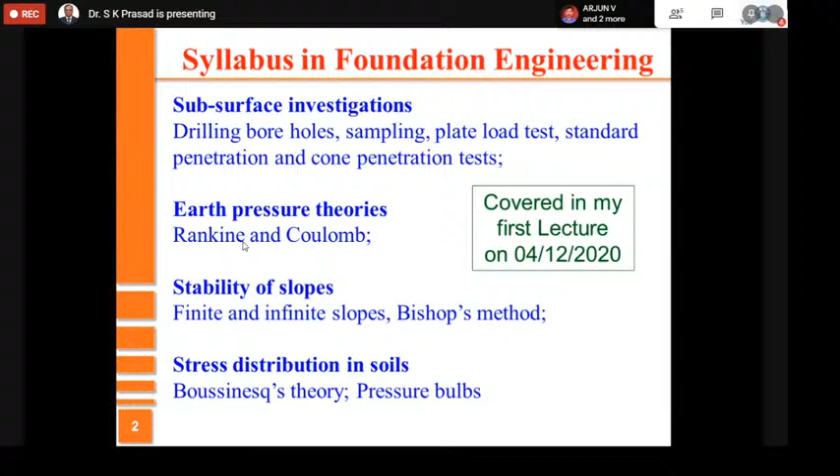So once again, good afternoon, friends. This is my second lecture on foundation engineering. If you remember, I gave the previous lecture on the 4th of this month, wherein I covered subsurface investigation, theories of earth pressure, stability of slopes, and stress distribution in soils. Now I'll be talking about a more important topic in geotechnical engineering, that is foundations. So we have both shallow and deep foundations, and also settlement analysis of shallow foundations. This is a vast subject, and if you recollect what I told in the previous lecture, a lot of questions have come from the shallow foundations area.

So looking at the importance in general of these topics, friends, I request you people to listen to the lecture. And as I said in the last class, the focus is not on giving the concept, the focus is more on cracking the GATE examination. So I don't have to mention the importance of foundations.

As you all know, this is the foundation which will hold the superstructure, which will be in direct contact with the soil below. The major objective of the foundation is to transfer all these forces from the superstructure to the soil below in such a way that the soil is not affected, it does not experience failure, nor does it experience excessive settlement. Therefore, you will be keeping in check the soil, which neither fails nor experiences settlement.

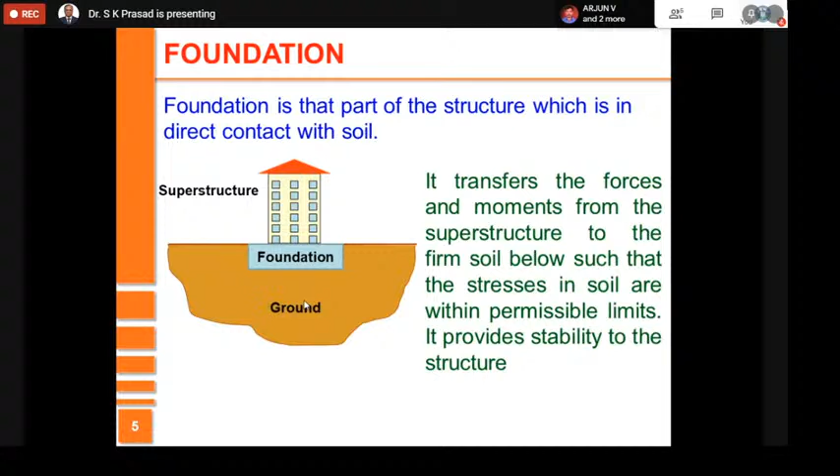So I always say we'll consider the two limit states, just like in case of concrete: limit state of serviceability and limit state of collapse. So one major objective of any civil engineer is that the structure is founded on stable ground, and the foundation is also as strong and as durable as possible. This is the most important organ of the structure, and hence it should be strong. It also should be founded on stable ground.

Then you will always have a question as to what location of the soil you should be interested in. If this is the superstructure and this is the foundation, the soil just below the foundation is the one which is affected because of the stresses induced due to the load from the superstructure. So the stresses in soil should be within limits. How much soil should you consider? Normally, if B is the width of the foundation, maximum 2 times B should be the depth, and 2 times B should be the width up to which you need to consider the effect. Beyond that, the effect of the loads from the superstructure into the neighboring soil will be negligible.

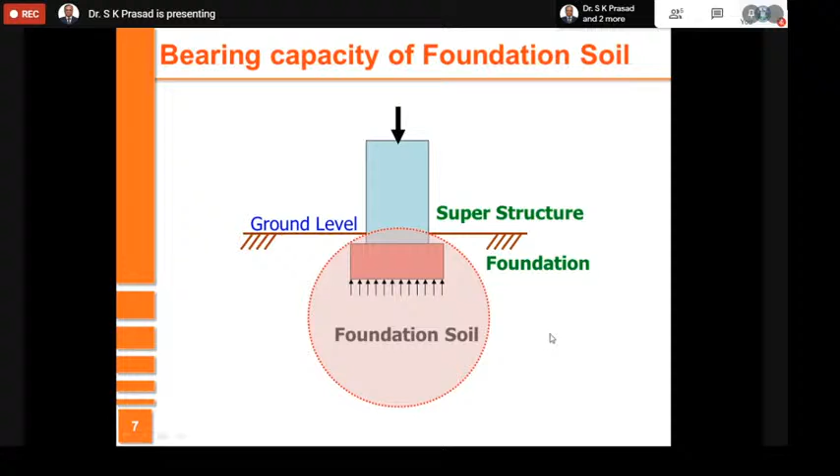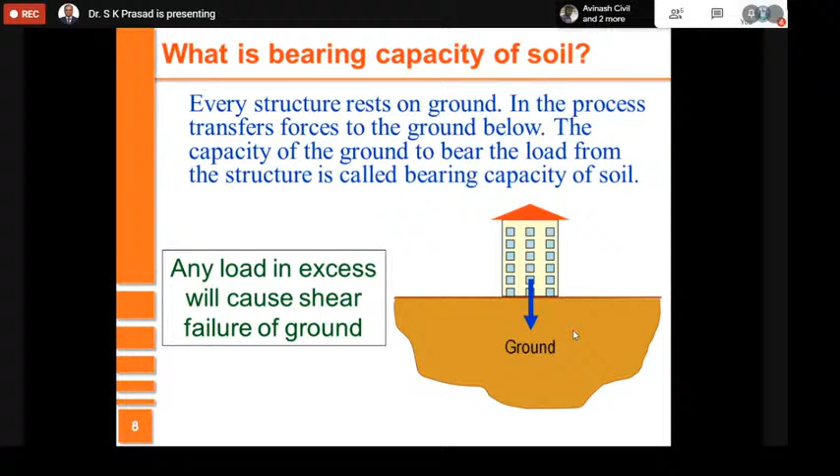As on today, every structure will have to rest on ground. I do not know, in future we may be able to put them in air, but as of now, every structure has to rest on ground, which means these structures which carry all kinds of forces will be transferred to the soil below. That means we have to identify how much load, how much force the soil can take before it fails, because that is very important to decide the kind of foundation for any structure.

Well friends, you have a soil having some weight, and it is for all practical purposes considered to be homogeneous, isotropic whenever possible. But in this case, at least we consider it to be homogeneous. Then we decide the depth at which the foundation is to be put, based on several aspects, mainly geotechnical aspects.

Once we decide on that, we will have the excavation made. Before that, the soil will have some stress in it. What is the stress? It will be the weight of the soil. Now you build your structure, and that structure will carry some weight. Due to that, the stresses here will be much more than what was the stress before, carrying much bigger stress.

We'll have to find out this stress, which later I show you, we call contact pressure. This stress should be within limits. What limit? We'll try to see in the lecture which follows now.

So we have a few terminologies we need to consider. One is ultimate bearing capacity. Ultimate itself shows that it is the maximum value. Bearing capacity is the capacity of the soil to bear that ultimate load, ultimate stress. I use the symbol QF to represent this. It is the maximum pressure which the soil just below the foundation can take before it fails.

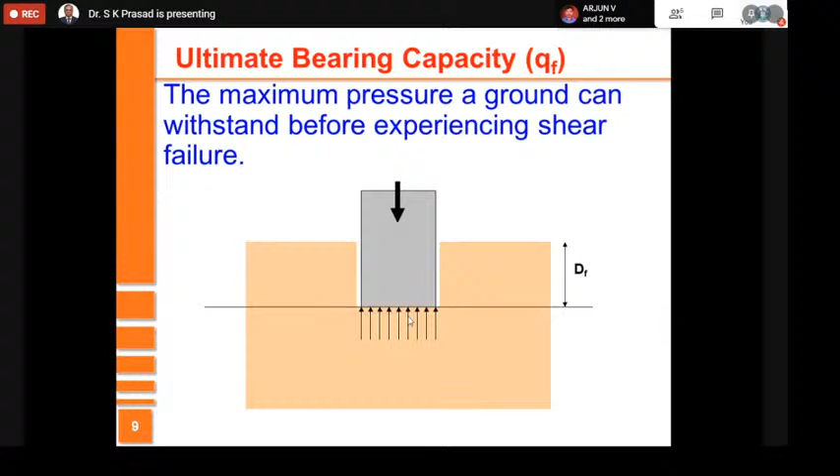All failures in soil are shear failures. Here also the failure will be shear failure. So ultimate bearing capacity, QF, is equal to the maximum force divided by the area at which the soil still does not fail; any further force and there will be failure.

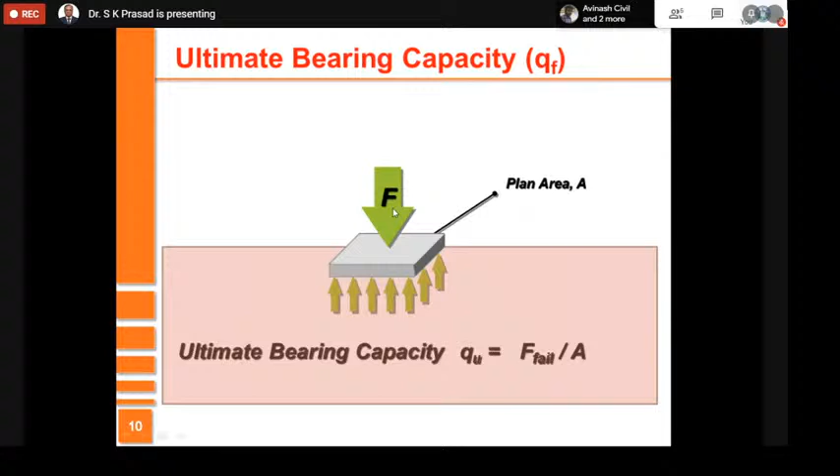We also use this terminology, net ultimate bearing capacity. What is net ultimate bearing capacity? Ultimate bearing capacity is the maximum load it can take. Net ultimate bearing capacity is maximum load minus whatever load it was taking before, that is the initial overburden pressure. So net ultimate bearing capacity, symbol Qn, will be equal to Qf minus initial overburden pressure Q naught. If there is no surcharge, then Q naught is equal to gamma times D, or dF here.

Then the terminology safe bearing capacity. This is very much used in the design office, one of the important parameters in the design of foundations, I would like to say most important parameter. So QS is the symbol I have given. Sometimes we simply say SBC of soil.

So QS is the safe extra load or extra pressure, in addition to the existing overburden pressure, that the soil can withstand. You have the existing overburden pressure, Q naught, plus the net ultimate bearing capacity, which is Qf minus Q naught. Only for the net ultimate bearing capacity do you apply the factor of safety, that's why I call it safe load, in addition to the overburden pressure. So it's always equal to overburden pressure plus safe pressure. Safe net pressure is safe extra load divided by factor of safety.

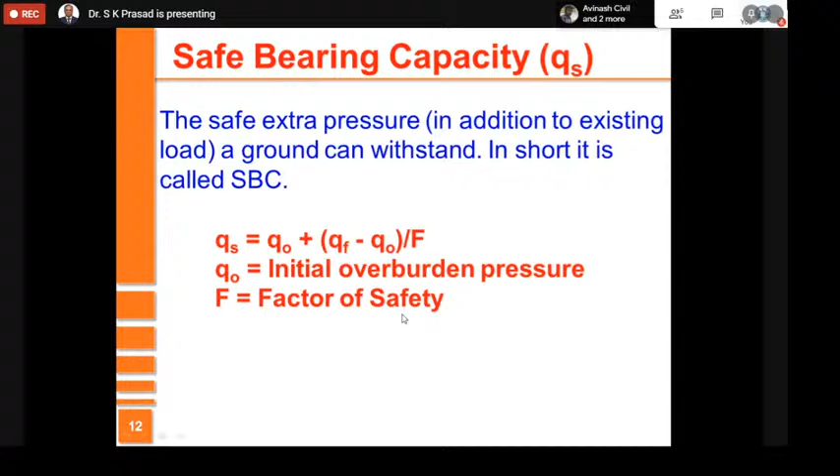Usually, if nothing is given, you can assume a factor of safety of 3. We use SBC very importantly for proportioning of a footing. If you know the design load, then knowing SBC, you can determine the area of the footing. It is one of the most common parameters for the design of foundations.

We also use another terminology called allowable bearing pressure, symbol QA, sometimes called ABP. This allowable bearing pressure is more superior to SBC in design, because it takes into account not just the failure, but also the other aspect, settlement, keeping the settlement well within limits. So it is the safe extra pressure a ground can withstand, considering both shear failure and settlement criteria.

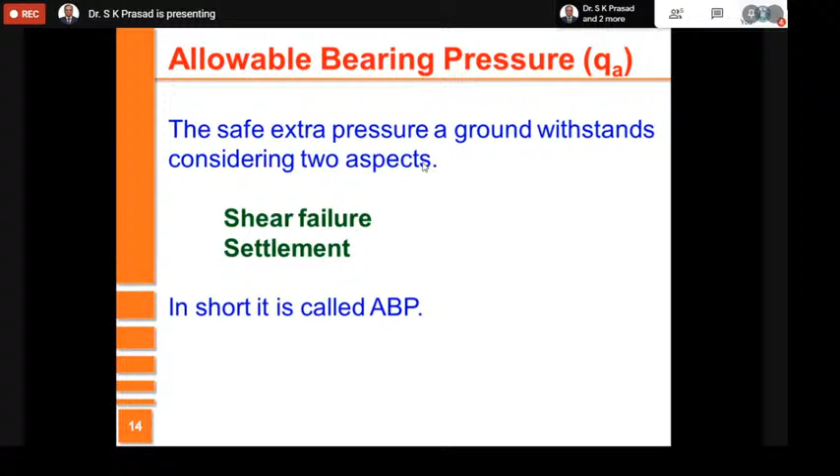Well friends, whenever a load is applied onto the ground, it will be stressed. You keep on increasing the load, stresses in the ground increase till such time it fails. There are many factors which influence the stresses in the ground and the failure of the ground.

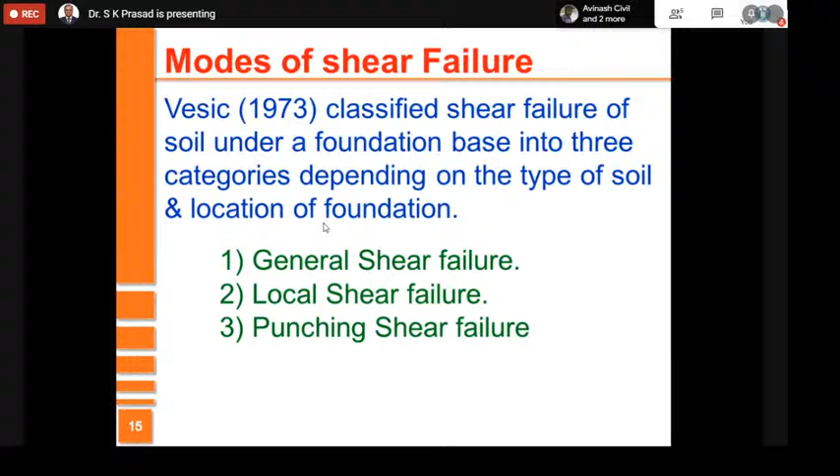One of the important factors is the mode of failure, mode of shear failure. Many researchers have worked on that. Vesic in 1973 was one of the first to mention that there are three modes of shear failure you can think of in bearing capacity determination of ground. The three modes of failure are: general shear failure, local shear failure, and punching shear failure. We'll try to see what these are and how we have to take them into account in our designs.

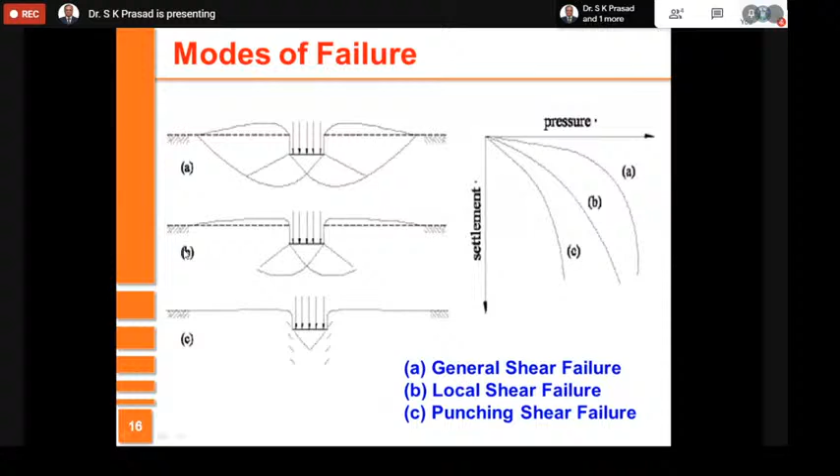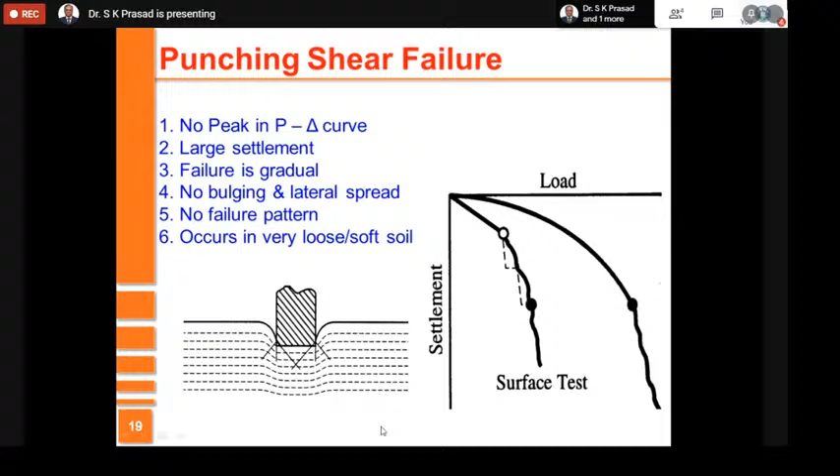You will not see bulging or lateral spread on the sides of the foundation. If you look at the previous case here, this is the failure surface, and it is very clear in general shear failure. On the other hand, the failure surface is not so clear in local or punching shear failure. This type of failure is seen in loose or soft soil.

I have tried to give the differences between these two. The important numerical values you should remember are: general shear failure happens in a soil which has a very large value of phi, equal to 36 degrees or more, in a soil which is stiff, therefore SPT N value will always be 30 or more. The relative density in case of granular soil will generally be more than 70%, and undrained shear strength CU will be more than 100 kilopascals.

On the other hand, punching shear failure is seen in a soil which is loose, therefore phi will be 28 degrees or less. SPT N value is less than 5. Relative density is less than 20%. CU will be less than 50 kilopascals. General shear failure experiences very small strain, 5% or so. On the other hand, punching shear failure experiences very large strains of the magnitude of 20% and above.

This was a graph plotted by Vesic to indicate the locations of general, local, and punching shear failure, plotted between relative density and relative depth. You can notice that general shear failure happens here, wherein the soil is in a relatively dense state.

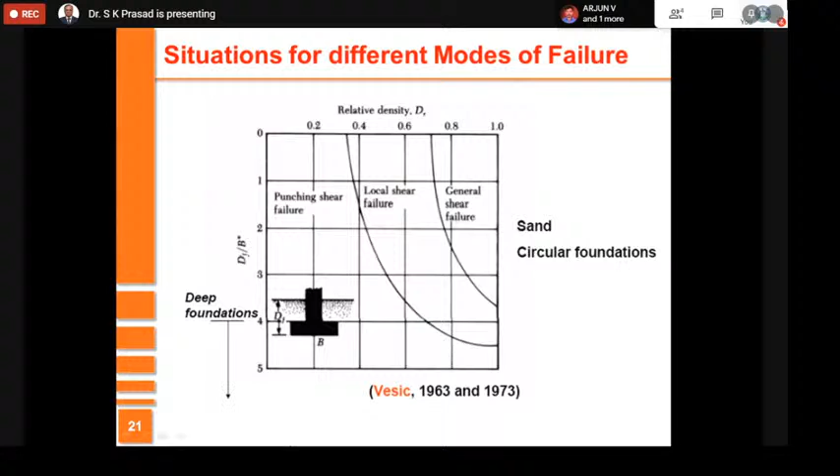So as a summary, phi greater than 36 degrees, we call it general shear failure, and we don't apply any correction in the equations we use. On the other hand, phi less than 28 degrees, we call punching shear failure, and in that case, we apply the correction.

The correction is that the cohesion should be taken as 2/3 of whatever cohesion is. The friction angle should be taken in such a way that tan phi of the system is equal to 2/3 of tan phi. It should be reduced, and accordingly you find phi dash.

Phi dash is used to find NC, NQ, N gamma, which you call NC prime, NQ prime, and N gamma prime. For phi value anywhere lying between 28 and 36 degrees, we just apply...

It's in the transition zone, therefore we try to interpolate, linearly interpolate.

The derivation is done by considering the limit equilibrium approach when the soil is at its plastic failure situation, and it's a semi-empirical method of analysis because somewhere you'll have to make certain intuitions, certain assumptions.

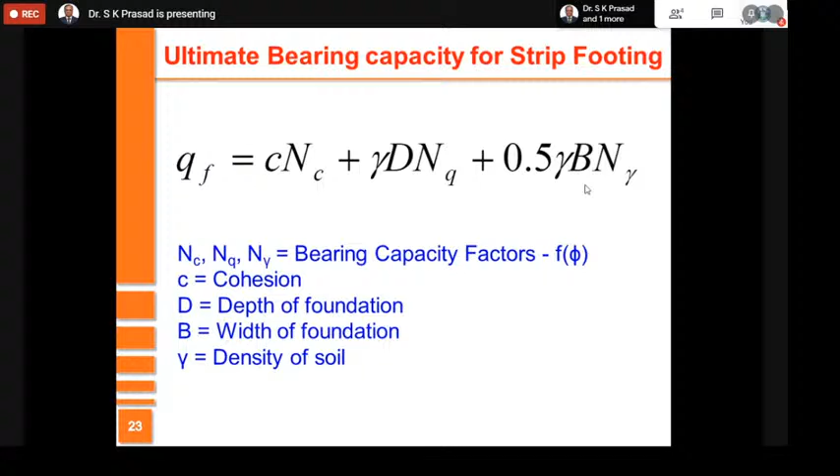Gamma is the unit weight of soil, you can just consider the bulk unit weight at a place. B is the width of foundation, and D is the depth at which the foundation base is placed, depth of foundation. And how do you find NC, NQ, and N gamma?

These are all direct functions of phi. Normally you have equations, you have graphs, you also have tables to determine them. So for various values of phi, it's a function of phi alone, you can find NC, NQ, and N gamma. And with increase in phi, all these also keep increasing.

According to Terzaghi's theory, when phi is 0, NC is 5.7, N gamma is 0, and NQ is equal to 1. On the other hand...

When phi keeps increasing, you will notice that these values also keep increasing. That means denser the ground, more will be phi, more will be the value of NC, NQ, and N gamma, and hence bearing capacity will be high.

On the other hand, when the ground is loose, phi is less, correspondingly NC, NQ, and N gamma are less, therefore bearing capacity also will be less. So this is Terzaghi's bearing capacity factor.

In case you have phi less than 28 degrees, you are required to reduce the shear parameters. Instead of C, you put C prime, which is 2/3 of C. Instead of tan phi, you put 2/3 of tan phi. And hence, the bearing capacity which you calculate for a soil with low values of phi will further be reduced. You apply that reduction.

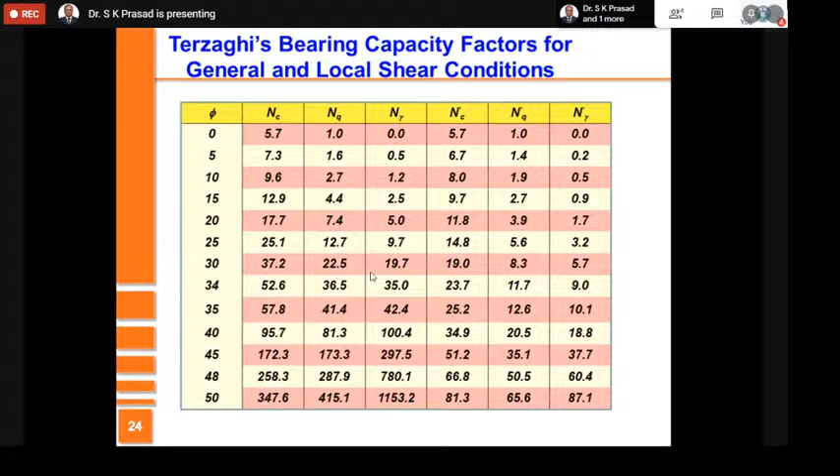So instead of NQ, you're going to use NQ minus 1. Likewise, safe bearing capacity is this net ultimate bearing capacity divided by whatever factor of safety you put, plus the initial overburden pressure, which is equal to gamma D whenever there is no surcharge. So if nothing is given, you can use a factor of safety of 3, but these days, factor of safety of 2, 2.5 are also used.

There are many factors on which this bearing capacity theory depends. One, of course, is the type or mode of failure I mentioned. The other important factor is shape. You notice that of the 3 shape factors, the first term is cohesion related, the second term is surcharge related, and the third term is density related.

So SC, SQ, S gamma are all equal to 1 for strip footing. Therefore, the same equation, QF equals C NC plus gamma D NQ plus 0.5 gamma B N gamma, holds good. On the other hand, if you use square, rounded, or rectangular footings, the equation slightly changes to take into account the geometry.

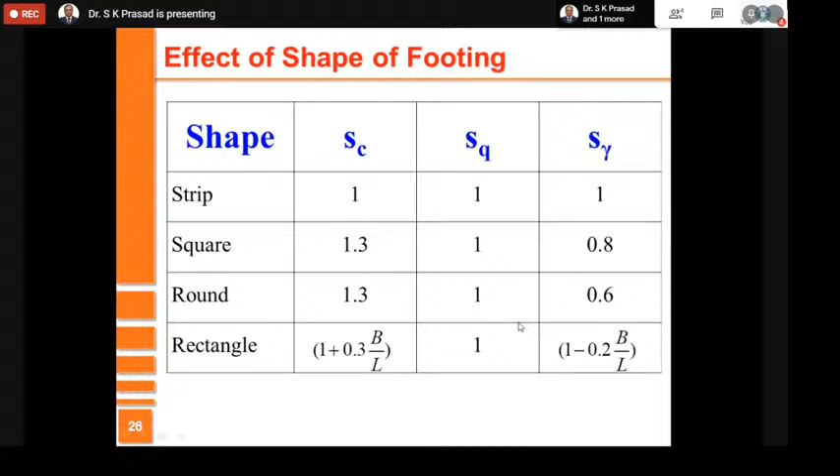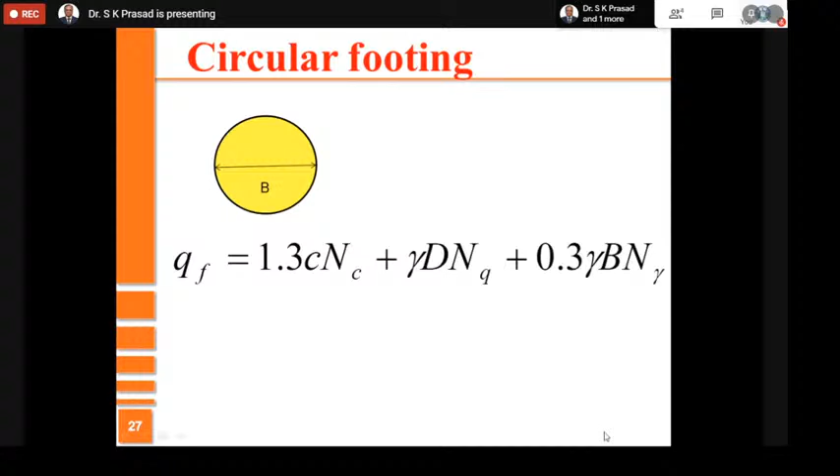So, friends, for circular footing, QF is going to be 1.3 times C NC plus gamma D NQ. And please note, instead of 0.5, it is 0.3 gamma B N gamma. On the other hand, for square footing, the only difference is in the third term, which is 0.4 gamma B N gamma.

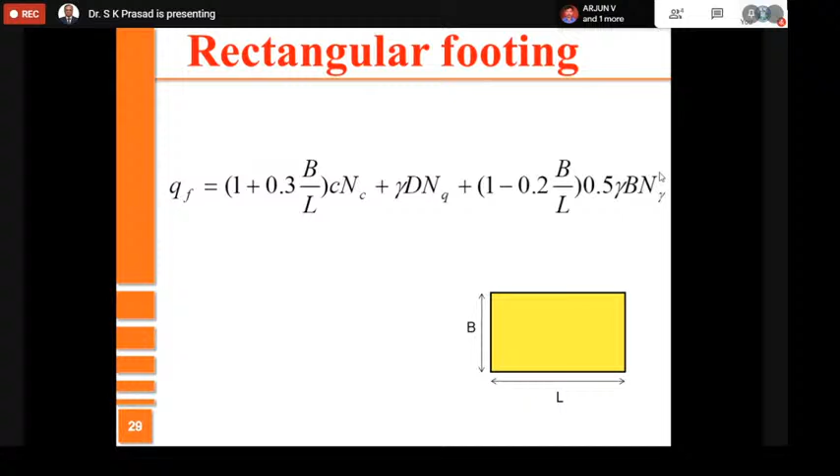And for strip footing, you should know that these shape factors are dependent on the size, for rectangular footing. So it is 1 plus 0.3 B by L into C NC plus gamma D NQ plus 1 minus 0.2 B by L into 0.5 gamma B N gamma. So if it is strip footing, you will notice that B is small compared to L, so B can even be 0 and L will be enormous. So this is rectangular footing.

The other effect which I want you to remember, or to consider, is the water table effect. Always we say water table or presence of water is dangerous to soil. It is the worst enemy to soil. So it can cause all kinds of problems, including failures, large settlements, and so on.

So Terzaghi gave an expression for considering the correction due to the presence of water table. He used this in the second and third terms, called RW1 and RW2. These are coefficients to reduce the bearing capacity due to the presence of groundwater table. So how do you find RW1, RW2? RW1 affects the second term, which is mainly due to the overburden in the neighborhood. RW2 affects the third term. So let us take this into account.

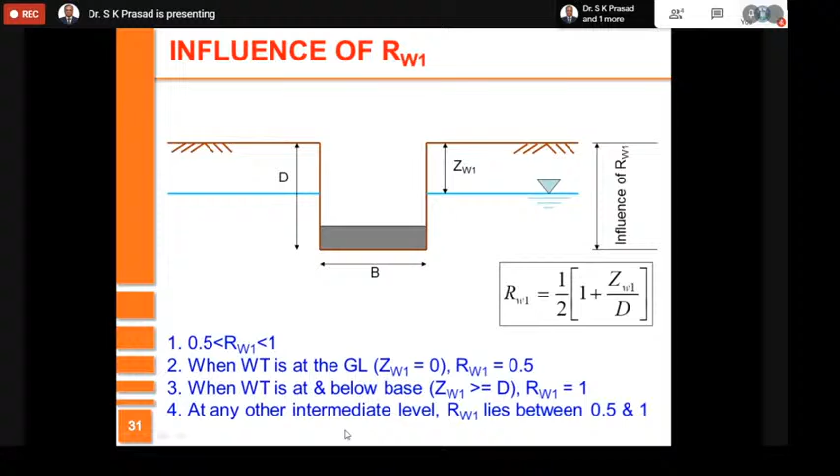RW1, by simple linear interpolation, is determined like this, where D is the depth, and ZW1 is the depth from ground surface to the point where the groundwater table exists. You should know that RW1 will always be between 0.5 and 1. When the water table is at the ground surface, RW1 will be at its lowest, 0.5. When the water table is below the base of the foundation, or even at the base of the foundation, RW1 is equal to 1. Anywhere in between the ground surface and that depth, RW1 will range from 0.5 to 1. So this is the expression for RW1.

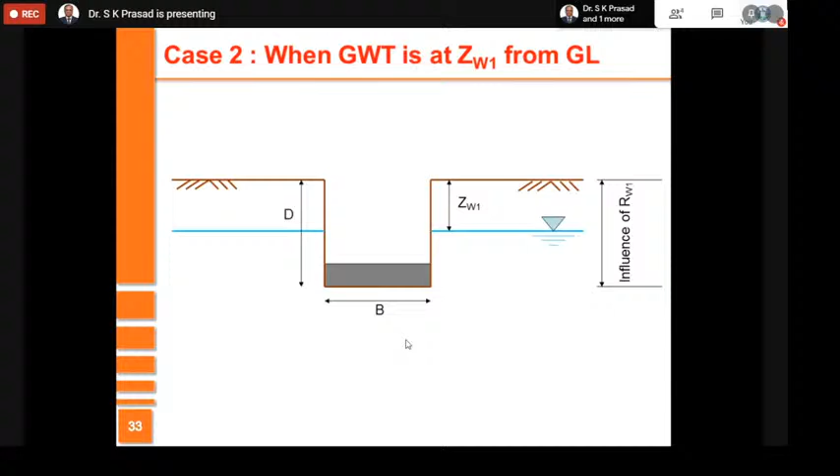So the effect of RW1 is to reduce the bearing capacity. When will that happen? Whenever the groundwater table is high. In case 1, the groundwater table is at the surface, therefore ZW1 becomes 0, and RW1 will be 0.5. In case 2, when the groundwater table is at a depth between the top surface and the base, RW1 is between 0.5 and 1. And the third case is when the groundwater table is at the base or below the base. Then ZW1 will be equal to D or more, therefore RW1 will be 1. So even if the groundwater table is much, much beyond, RW1 will still be equal to 1.

Then, RW2 determination requires measurements made to the groundwater table surface from the base of the foundation. It's not from the ground surface, but from the base of the foundation. This value, which we call ZW2, will range anywhere from 0 to a great value. But whenever this influence zone exceeds a depth beyond the width of the foundation, you don't have to worry; you can simply say the groundwater table is at a deep elevation, so you don't have to take its effect into account. So, friends, RW2 also ranges between 0.5 and 1, and it is basically measured from the base of the foundation till the groundwater table level.

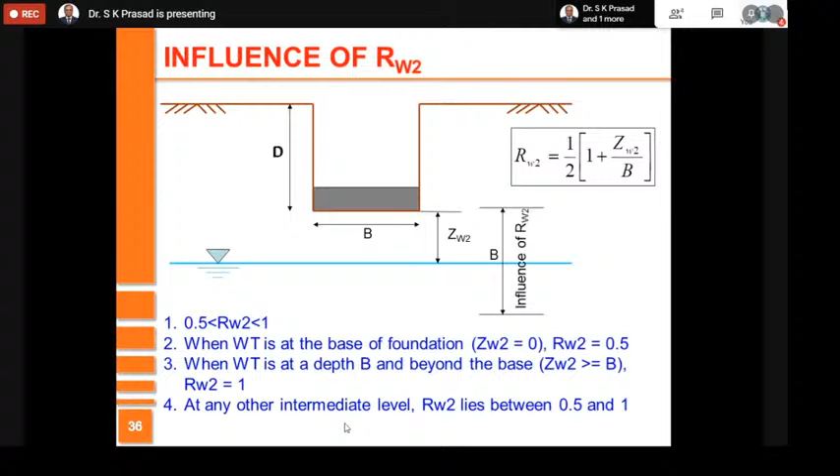When the water table is at the base of the foundation, the value is 0.5. When the water table is at a depth B or beyond the base of the foundation, RW2 is equal to 1. Any intermediate value, RW2 will lie between 0.5 and 1.

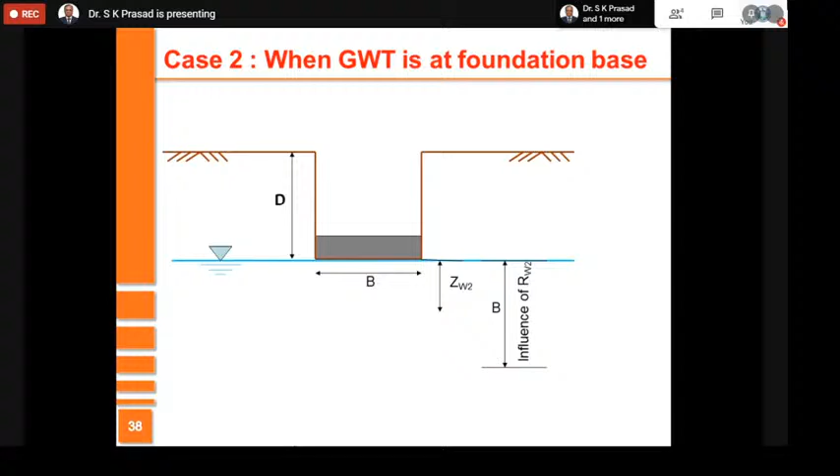So whenever the groundwater table is either at the base or at the top, you will notice that RW2 is 0.5. On the other hand, whenever the groundwater table is at the base, here also RW2 is 0.5. But if it is at some depth below the base of the foundation, you will notice that RW2 lies between 0.5 and 1. And when the groundwater table is below the foundation base and beyond B, at a point much beyond B, there is no effect of the groundwater table, and hence RW2 is equal to 1.

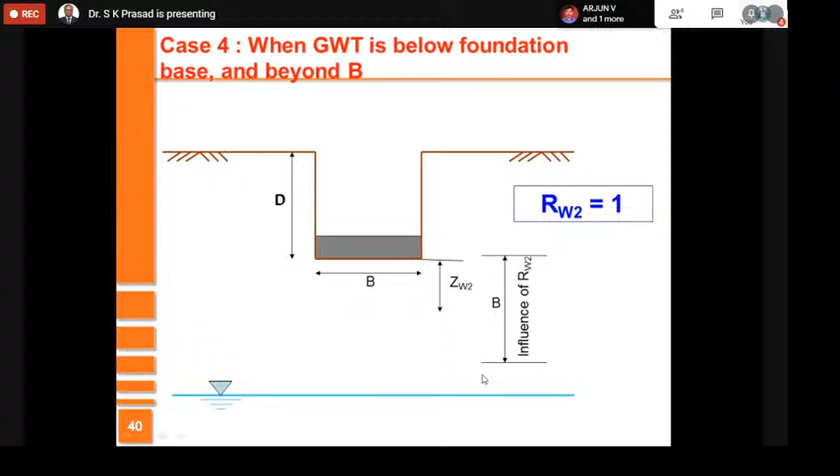So we use simple interpolation equations to determine RW1 and RW2. The value range is between 0.5 and 1 for that.

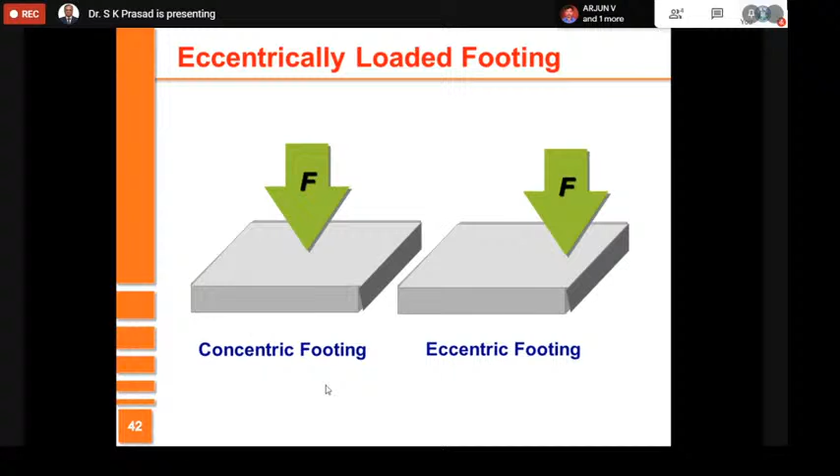The other important function or factor we have to consider is eccentricity in loading condition. It is always assumed that the load is concentric, and hence load is distributed evenly on the foundation. Therefore, the reactions from the ground also is even. Just imagine a situation when the distribution is not even, and when the load is applied not concentrically but eccentrically, things are going to be different. So let us try to see how it is taken into account.

For instance, you have the foundation and you have the load. If the load is central, automatically the resultant also passes through the center, through the CG of the load, and hence the distribution at the base will be uniform. On the other hand, if the resultant of the force is not along the centroid, you will notice that the resultant will be shifted a little away. Therefore, you have to find out the eccentricity by which it has shifted.

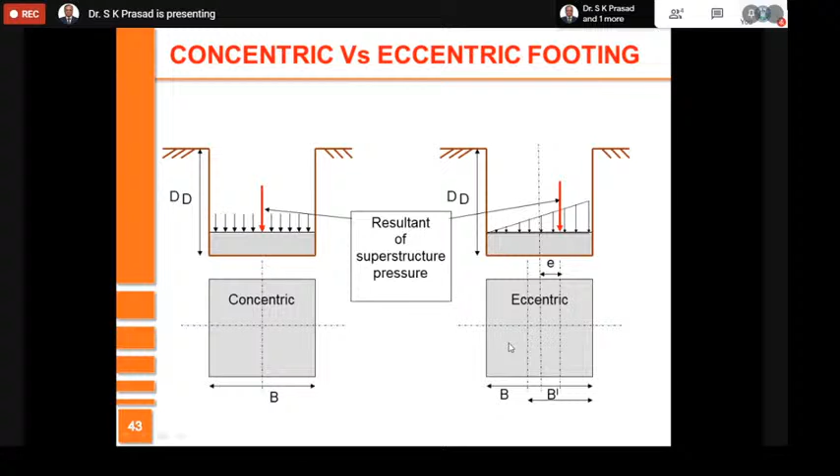Once you know this eccentricity, then you need to consider the effective width only, which I call B dash, which is equal to the actual width minus 2 times E. This is what you have to take into account. And hence, a footing can be eccentric when the resultant is shifted beyond the CG, when there is a moment in addition to force, and in one or both directions you can find the eccentricity. But here, we will restrict our talk to only when eccentricity is along one direction.

So consider a situation when you have the footing in plan like this. The centroid of the footing is here. The load, resultant of the load, also is supposed to be here, but due to some reason the resultant is shifted by some quantity called E or Ex here. So it is presumed that once it is equal to Ex, then 2 times Ex will not be acting, and hence the only width you have to consider is this one, which is equal to, say, B dash, and B dash is equal to total B minus 2 times E.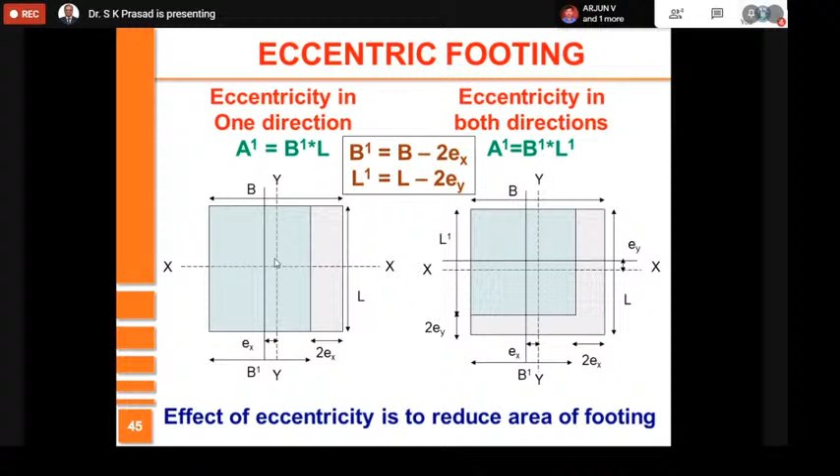So in all your calculations of bearing capacity, you need to consider the equivalent B, and whenever eccentricity is in both directions, it will be something like this. Therefore, though you provide this much foundation, only a part of the foundation is expected to act. That means you are going to reduce the area of cross section. On the other hand, the effect of eccentricity is to reduce the bearing capacity.

Accordingly, you need to consider the different factors influencing the bearing capacity. Like before, you have the 3 terms. The first one is the cohesion term, second one is the overburden term, the third one is...

Sorry, sir. Yeah, I'm in a class. I'll take your call later on. Okay.

So 3 terms, and hence the only additional things here are you try to take the effects of shape, depth, and the other one is inclination of the load. So shape effect in Terzaghi's theory, I gave you the...

coefficients which you need to consider for different shapes like square, rectangle, as well as circular. But here is a general bearing capacity theory considering not only the shape effect, but also the depth effect and the other situation when you don't consider the load to be concentric, load to be vertical, when the load is inclined. It can happen because you also need to consider the horizontal load. Therefore, the resultant can be inclined.

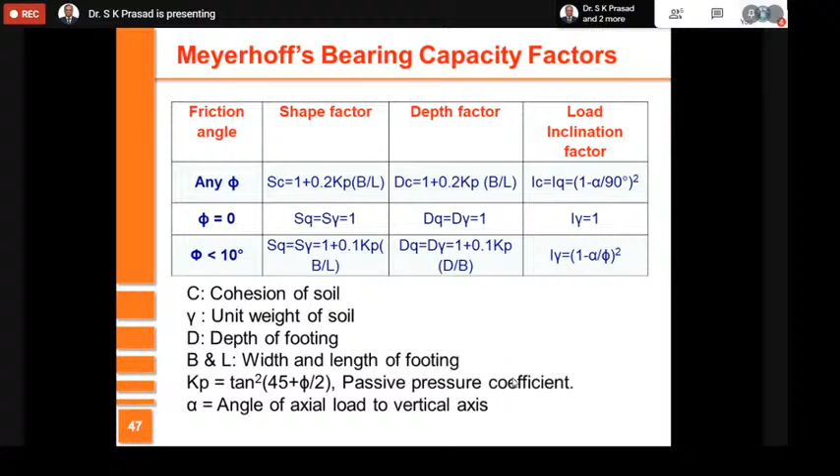This table gives the values of shape, depth, and load inclination factors for different phis. Here C is cohesion, gamma is unit weight of soil, D is the depth of the footing, B and L are width and length of footing, and you find out Kp, the coefficient of passive earth pressure, alpha, angle of the load with respect to the vertical.

Friends, again I stress that you should remember these terminologies because normally a problem related to bearing capacity theory will have a huge amount of words in the question. That means you'll have to read the question several times. And sometimes they will ask ultimate bearing capacity, sometimes they will ask net ultimate bearing capacity and so on. So I want you to remember this.

Ultimate bearing capacity I have symbolized as QF. Net ultimate bearing capacity I have symbolized as QN or QNF, which is equal to QF minus overburden pressure. If the ground is level, then it is gamma D. QS is the safe bearing capacity, which is equal to net ultimate bearing capacity divided by factor of safety plus extra pressure. There is also net safe bearing capacity, which is equal to QS minus gamma D or this value alone. I want you to be clear.

So there are a number of questions which are asked. I'll read out the questions.

A 3 meter wide strip footing, please note strip footing, width is 3 meters, is founded at a depth of 2 meters below the ground surface in a C-phi soil. Water table is at 5 meter depth, so basically 5 meters is beyond the scope, you can neglect the effect of water table. Soil properties are given, C is given, phi is given, gamma sat is given, gamma bulk is given, and gamma W of course is given. The values of bearing capacity factors are shown here.

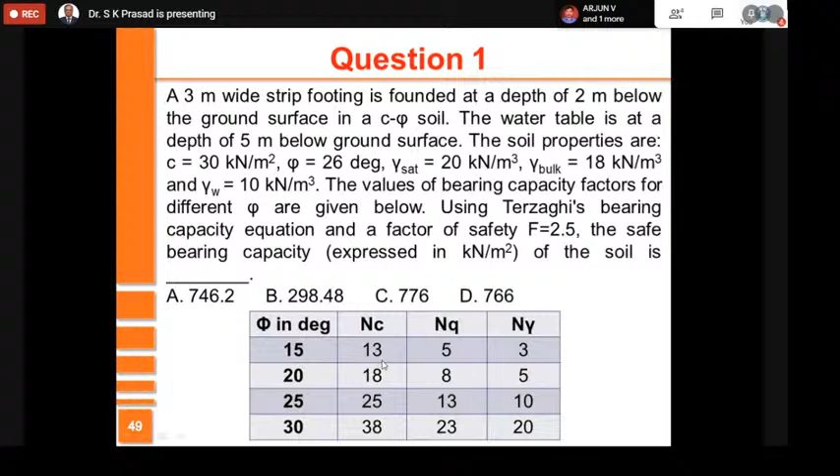Find out the bearing capacity and find out the safe bearing capacity, and you will notice that this is the answer you will get. The nearest answer is B, and hence you know it is acceptable.

The next question is a square footing 2 meters wide is placed at a depth of 1 meter in a sand deposit. Please note sand deposit, that means C is 0. Dry unit weight of sand is given as 16 kilonewton per meter cube. This footing has an ultimate bearing capacity of 800 kilopascal.

So QF is given. The depth factors dQ, d gamma are 1, you don't need to take that effect. Bearing capacity factor N gamma is 20. So what you are required to find is: you have a new footing whose side is 3 meters, depth is 2 meters.

And for a factor of safety of 3, you have to find out the SBC of the new foundation. Please note that SBC is not a unique value, it depends on the shape of the foundation, size of the foundation, and many other things. So in this case, I have the equation for strip footing.

2 meters wide square footing is there, so I need to apply the square footing equation: 1.3 CNC plus gamma D into NQ plus 0.4 gamma B N gamma. Since C is 0, that term vanishes. I know N gamma, I know QF, and hence I find NQ. That's what I've done here.

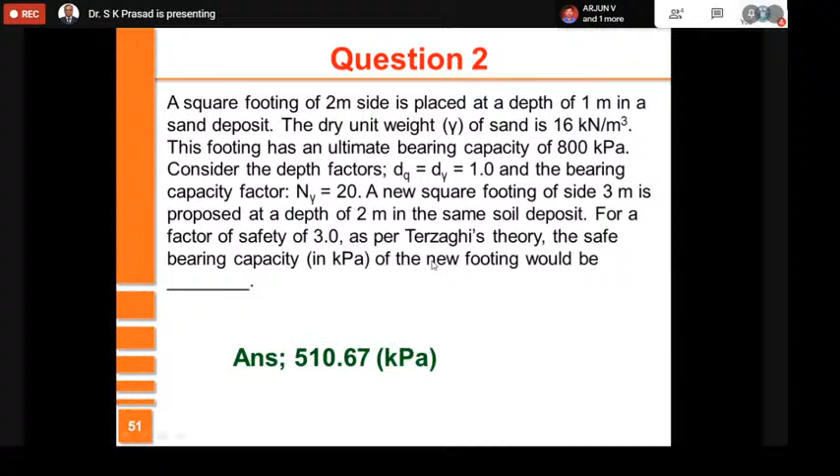Likewise, you have the third question. A square footing, 2 meter by 2 meter, is subjected to inclined load in this case. The load is inclined by an angle alpha equal to 30 degrees. The water table is located well below the foundation, so you don't have to take its effect.

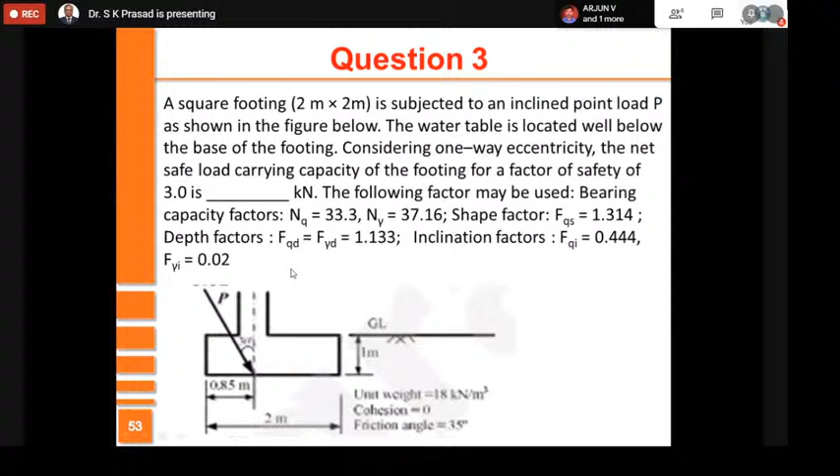Considering one-way eccentricity, the net safe bearing capacity of the soil when factor of safety is 3 is so many kilonewtons. Bearing capacity factors NQ and N gamma are given. C is 0, therefore NC is irrelevant. Shape factors are called FQS and F gamma S. Depth factors are given as FQD, F gamma D. Inclination factors are given as FQI, F gamma I, and so on.

So I have put all these values, and what I am required to find is the net safe bearing capacity. Net safe bearing capacity is ultimate bearing capacity minus gamma D, divided by factor of safety. All things known, I only need to determine the value of ultimate bearing capacity and substitute here. So I calculated everything, but I missed out finding the final value here. So just substitute the relevant data here.

Likewise, there are many questions, I will probably go to these later on. Maybe I'll just try to answer one last question. Net ultimate bearing capacity of a footing embedded in a clay stratum, choices are given. Please note, net ultimate bearing capacity. So when I say bearing capacity, this is the equation. Net ultimate bearing capacity is this minus gamma D. So that's equal to CNC plus gamma D into NQ minus 1 plus 0.5 gamma B N gamma.

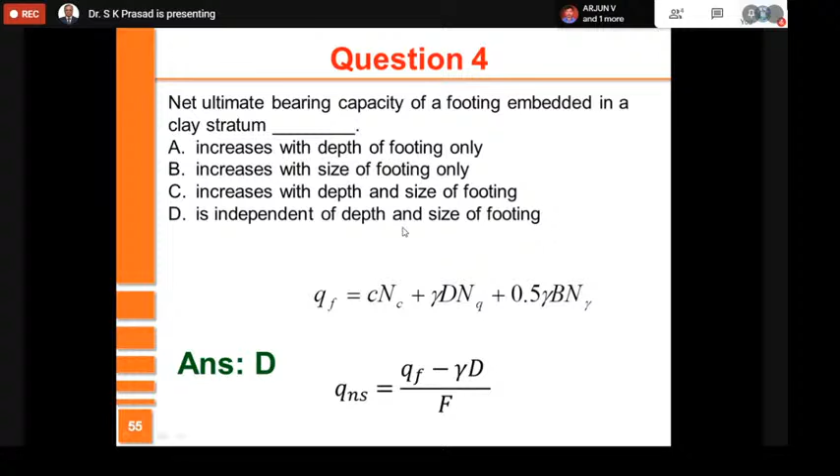So what does it do? Does it increase with depth of footing only? Or does it increase with size of footing only? Or does it increase both with depth and size? Or is it independent of depth and size? Please note, the catch is what type of soil it is. The moment it is clay soil, only C exists. NQ will be 1, and when you take net ultimate bearing capacity, NQ minus 1 will be 0, and N gamma is 0. Therefore, the second and third terms vanish, and only C and NC remain, which is independent of both depth and size. Therefore, the answer is D.

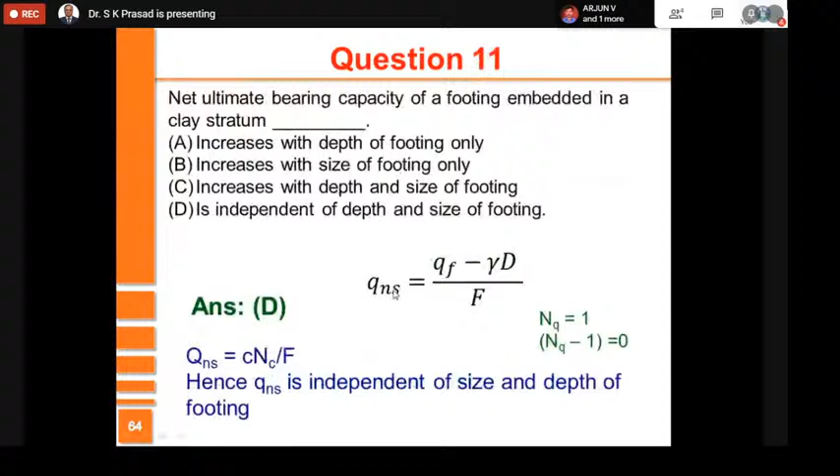I'll go to these other questions a little later if I have time. Let me take this question number 12. Four columns of a building are located within a plot size of 10 meter by 10 meter. Four columns are arranged like this. The expected load on each column is 4,000 kilonewtons. Allowable bearing capacity, ABP or SBC, is 100 kilopascals, that is 100 kilonewton per meter square. What type of foundation do you suggest for it? Please note, plot size is 10 into 10, that is 100 square meters.

Each individual foundation, with an SBC of 100 kilopascals, for 4,000 kilonewtons requires 40 square meters. There are 4 such columns, so 4 into 40 is 160 square meters, which is greater than 100 square meters. So you can't have an isolated footing, and you can't have a raft foundation either. The only choice is to go for a deep foundation, that's pile foundation. Therefore, the answer is C.

So I go further into the types of foundation. Broadly, foundation is classified into two types: shallow and deep. A shallow foundation is one whose depth is smaller than the width. A shallow foundation generally assumes that the neighboring soil does not exist, meaning the entire load is transferred at the base. Given a choice, you should go for shallow foundation.

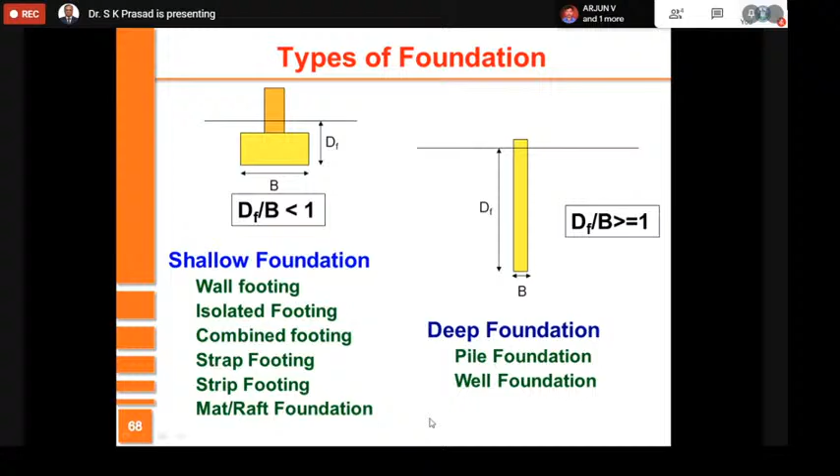So a shallow foundation is one in which the load from the superstructure is not extraordinary, basically it is small, plus the soil in the neighborhood at shallow depths has sufficiently good bearing capacity. Under that situation, you go for shallow foundation. On the other hand, you go for deep foundations when the foundation is taken deep through a weak soil into hard rock or bedrock, and in deep foundations, automatically the load from the structure will be high and the soil near the surface will be weaker.

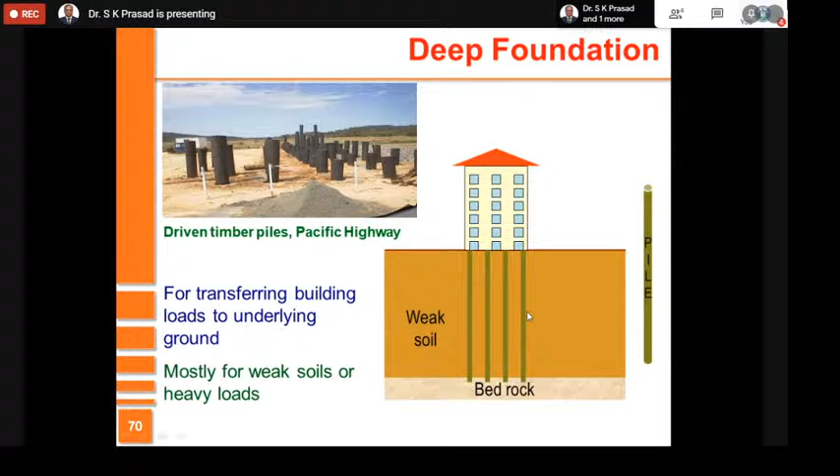These are typical shallow foundations. Isolated footing, very common one, used for one single column, one footing for one column. If you combine 2 columns together and put one single foundation, it is called combined footing. Sometimes you can go for strap footing when you provide 2 separate foundations and then a rigid beam connecting these 2. Strip footing is one in which you have a number of columns in a row connected together. If they are in different rows, then you go for raft foundation, which is a complete solution.

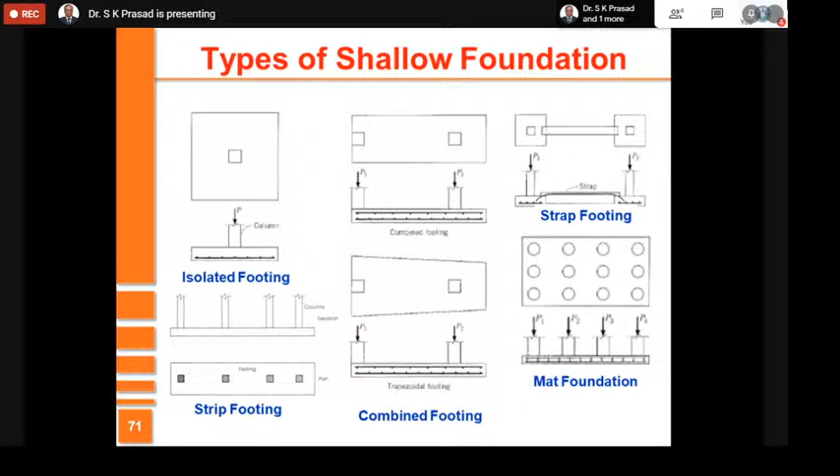Proportioning a foundation requires the knowledge of SBC or allowable bearing pressure of soil. So if I have a load of 1000 kilonewtons, if I put a foundation of some area, say 1 meter by 1 meter, the soil here will be subjected to stress equal to 1000 by 1 square meter, that is 1000 kilonewton per meter square or kilopascal. If I want to reduce the stress here, I need to increase the area. So instead of 1 meter by 1 meter, if I provide a 2 meter by 2 meter footing, then the stress will be 1/4 of that, 250 kilonewton per meter square. So depending on what is the stress which is permissible at that place, you decide to proportion the foundation, which is important.

Very quickly into combined footing. As I said earlier, whenever you have a footing in which two columns are connected together and you have one single foundation, you call it as combined footing. You provide a combined footing under these conditions. It is preferable to go for isolated footing. Only when it is not possible to go for isolated footing, you go for combined footing, which is more costly. The cost is mainly due to the cost of the shear reinforcement in the form of rings in the foundation.

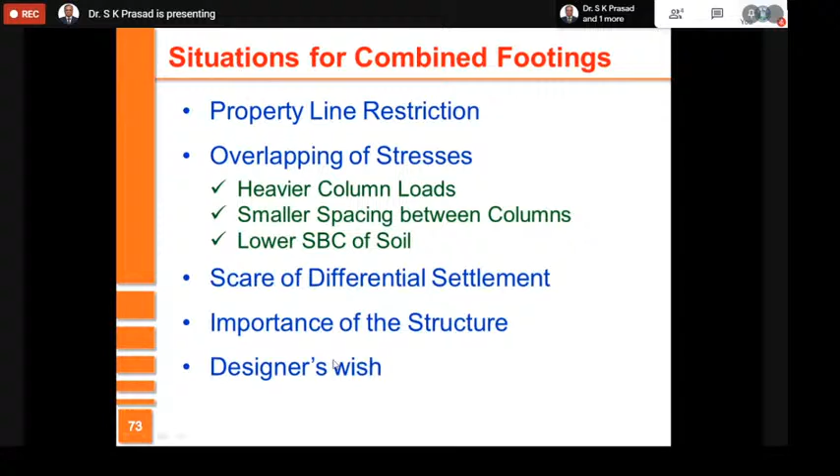So one of the important reasons why you go for combined footing is the property line restriction. The other important reason is when the columns are closely spaced, when the columns are heavily loaded, when SBC of the soil is low, that is when the stresses can overlap. You also go for combined footing when you have scare of differential settlement, or when you believe the structure is very important and you don't want to take any risk. Sometimes, based on designer's wish, also you provide the combined footing. I skip the discussions on this and go further. If there is time, I'll be happy to talk about it later on.

Raft is a complete shallow foundation. Whenever you have a raft foundation, you can say that the structure is going to be very stable. And you go for raft foundation under these conditions: when there is a property line restriction, when there is a possibility of overlap of stresses, scare of differential settlement, whenever the structure is important, at the time when the designer decides for his convenience, groundwater table is fluctuating and it is near the surface, you have cellar floor, and you have restriction due to settlement. Under these situations, you go for raft foundation.

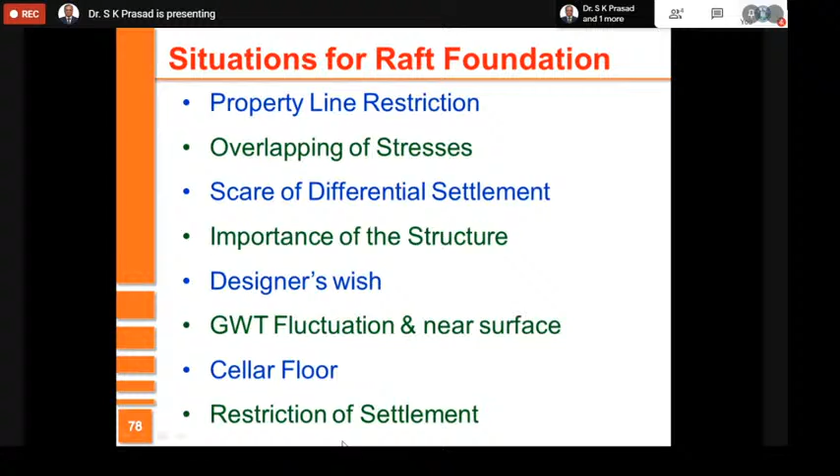Please note that raft is very expensive. It is the costliest of shallow foundations, and you will avoid it wherever possible. But when you provide a raft foundation, it is more robust. You go for raft foundation whenever there is settlement criteria, whenever you feel that the settlement is beyond limits and hence you want to reduce it, or when more than 50% area is covered by the foundation, then also you go for raft foundation.

A simple thumb rule: in case you want to increase the number of floors, you go deeper. You just have one basement floor, which is equal to 3 meters. And if you provide one basement floor like this, you may be in a position to put 3 additional floors. So whenever you want to increase the number of stories, you may go for raft foundation.

Quickly onto contact pressure. Contact pressure is the pressure which you see or which is experienced by the soil exactly below the foundation. So in a very simple way, contact pressure is equal to load divided by area of the foundation. Please note that contact pressure depends upon the rigidity of the footing, whether it is rigid or flexible. It depends upon the type of soil, whether it is a granular soil or cohesive soil. And when you go deeper into the foundation, because of depth of embedment, the contact pressure becomes more or less uniform.

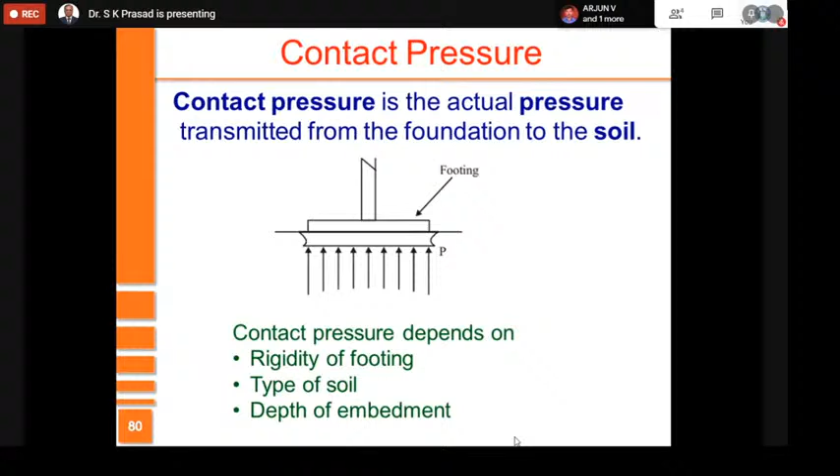So you notice that the major difference between a rigid footing and flexible footing in terms of contact pressure is: in rigid footing, contact pressure is never uniform. On the other hand, in flexible footing, contact pressure is uniform, but the footing experiences settlement which is uneven.

Depending on type of foundation and type of soil, the contact pressure changes. In granular soil, like sandy soil, contact pressure will be maximum at the center because of the effects of confinement, and at the edge it will be close to zero. On the other hand, in a cohesive soil like clay soil, due to edge stresses, the contact pressure will be maximum near the edges and minimum near the center.

I go on to the other aspect, settlements. Please note that settlement is a very important phenomenon which has to be taken into account. Whenever you have a structure subjected to load, the load gets transferred onto the soil, which is compressible. Depending on the stresses experienced by the compressible soil, the soil will compress and experience a vertically downward movement, and hence the structure also moves vertically downwards. This vertically downward movement of the structure is called settlement.

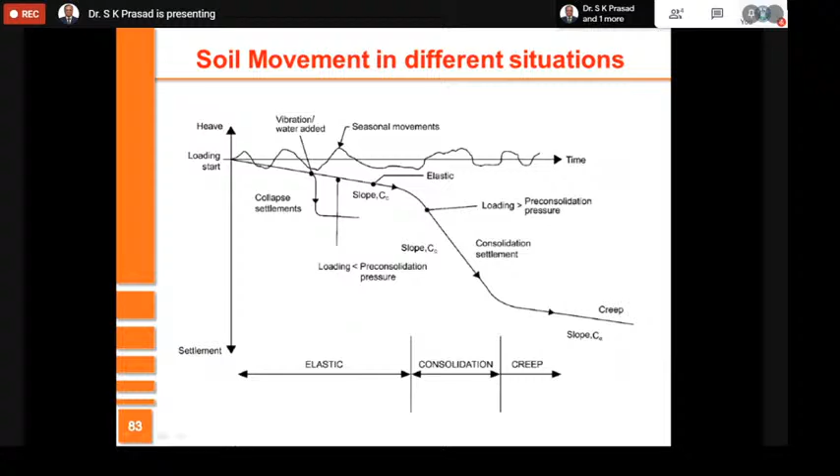If it is uniform, then maybe the structure won't fail, but it will have a lot of serviceability problems. On the other hand, if it is non-uniform, quite likely that the structure may fail, which we have to take into account. So with time, for various reasons, soil experiences movement, and remember, the settlement can be divided into three components.

SI, which is immediate or elastic settlement. SC, which is consolidation settlement. And SS, which is secondary settlement. The first settlement which happens is the immediate settlement, which happens in about 15-20 days after the load is put, after the structure is built. After that, consolidation settlement may or may not happen depending on the type of soil and the saturation level of the soil. Then the secondary settlement happens later, very much later.

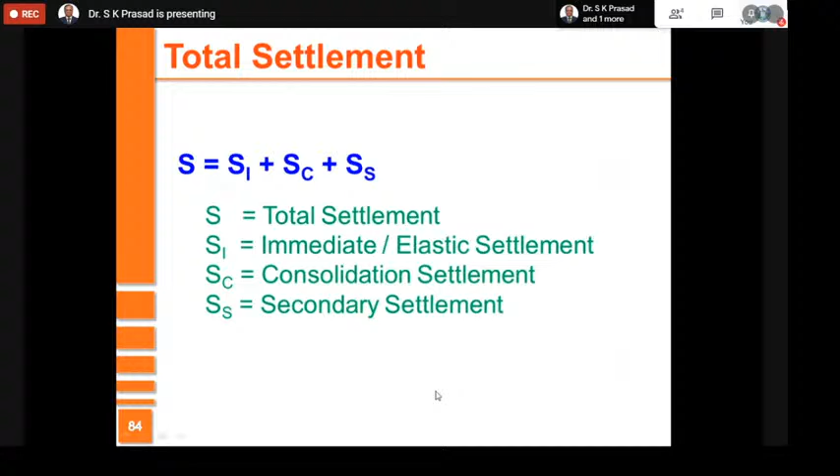So friends, I would like you to remember a few formulae here. Immediate settlement, as the name itself says, is the settlement which happens immediately. It is also called elastic settlement, and hence to compute this you use elastic theory, elastic constants. It is experienced by all types of soils, so it all depends upon the elastic constants. And the formula which you need to use is this. I want you to remember this.

So SI equals (1 minus mu squared) by E, multiplied by Q, multiplied by B, multiplied by I rho. This bracketed term is the elastic property of the soil. Q is the contact pressure, B is the width of foundation, and I rho is called the influence factor. I want you people to remember this equation, wherein E stands for Young's modulus of soil, mu stands for Poisson's ratio, Q is the contact pressure, B is the width, and I rho is the influence factor, which depends upon the rigidity and shape of the foundation.

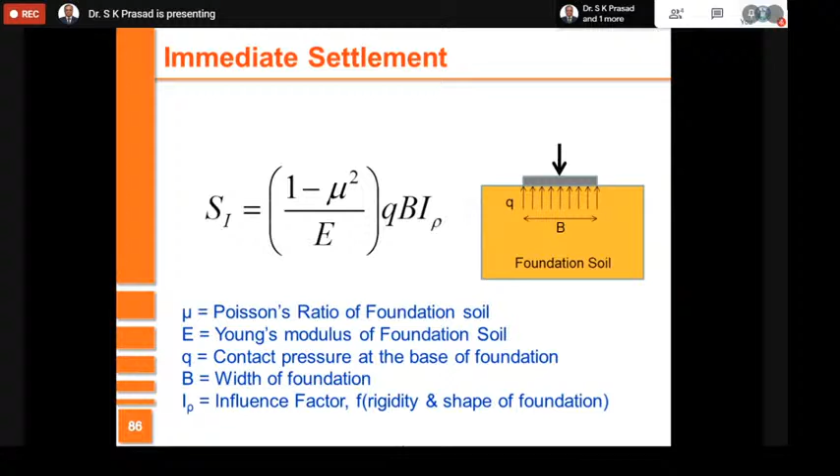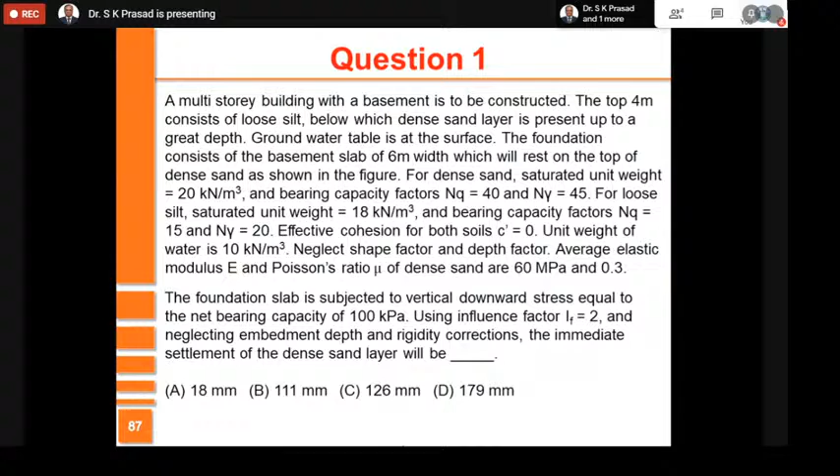There are a number of questions. This question is so long, but you are required to find here the immediate settlement. Please note, immediate settlement - the values are given. This is the equation which you have to remember. In immediate settlement, you require mu and E of soil. Please note, mu stands for Poisson's ratio, E stands for Young's modulus of elasticity of soil, and Q is the contact pressure, which is equal to load divided by area. B is the width, and I rho is called influence factor, which depends on two things, rigidity and shape of the foundation. In this case, all values are given, including I rho.

I rho is given as 2. I have written here as IF, that's given as 2. So E is known, it is given in MPa, I have put it in kPa. Q is known, B is known, mu is known. Therefore you find out immediate settlement, which happens to be 0.0182 meters.

Exactly similar is this question. You have a circular raft, so B is going to be 20 meters diameter, 1.6 meters thick, which is provided for a tank that applies a bearing pressure of 110 kilopascals. Therefore 110 kilopascals is the contact pressure, Q. In sandy soil, having Young's modulus 30 MPa or 30,000 kPa and Poisson's ratio mu equal to 0.3. Raft is made of concrete. Raft values are given a large number of times in geotechnical engineering - unnecessary data are given, don't get confused.

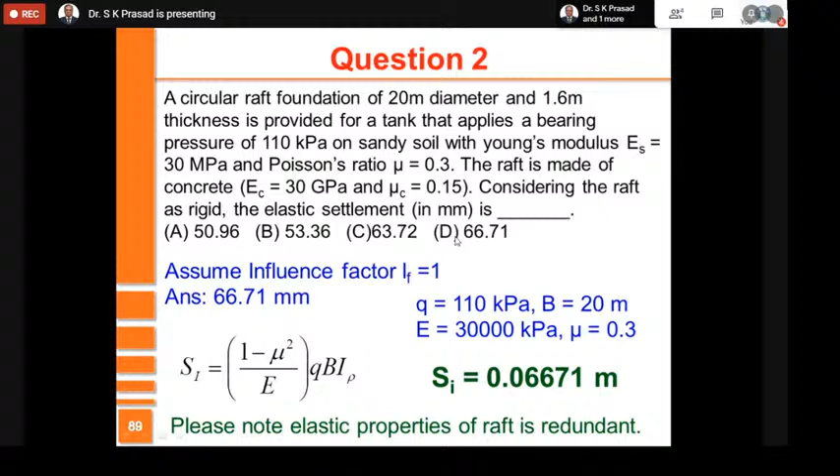I'm not going into the theory of this, but never get confused between compaction and consolidation. Both experience volume change, in fact volume reduction. Compaction is a mechanical process where volume reduction is due to expulsion of air. Consolidation, on the other hand, is due to expulsion of water. So consolidation can happen only in saturated clay, whereas compaction can happen in partially saturated soil.

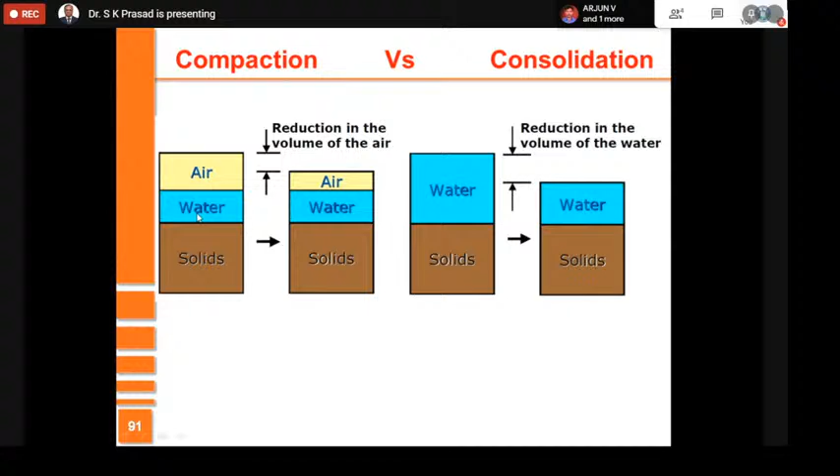I'll not go deep into this, and I want you to remember this equation. SC, consolidation settlement, is equal to CC by 1 plus E naught. CC happens to be the compression index, which you obtain from the consolidation test. E naught is the initial void ratio, and H is the thickness of the clay layer.

Please note, it is clay only. You don't consider sand because sand does not experience consolidation. Log to base 10 of sigma naught dash - we use sigma naught dash, but here I have just put sigma naught. It is the effective initial confining pressure or effective initial overburden pressure at the middle of the clay layer. And delta sigma is again at the middle of the clay layer, the extra pressure which is going to happen due to the new construction.

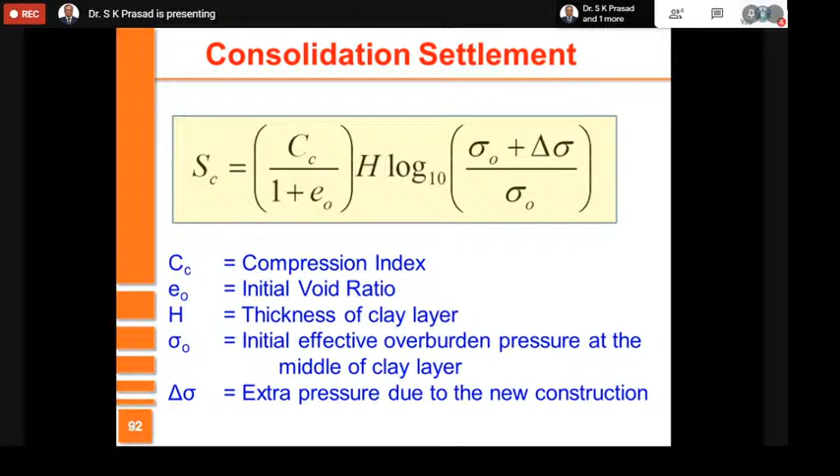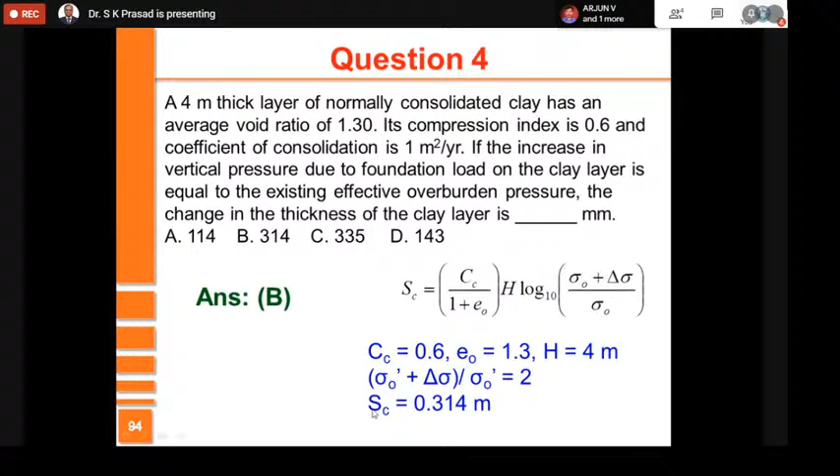Degree of saturation has to be 100% if it is consolidation, so S is equal to 1. Therefore, WG equal to SE, and hence the void ratio E is determined.

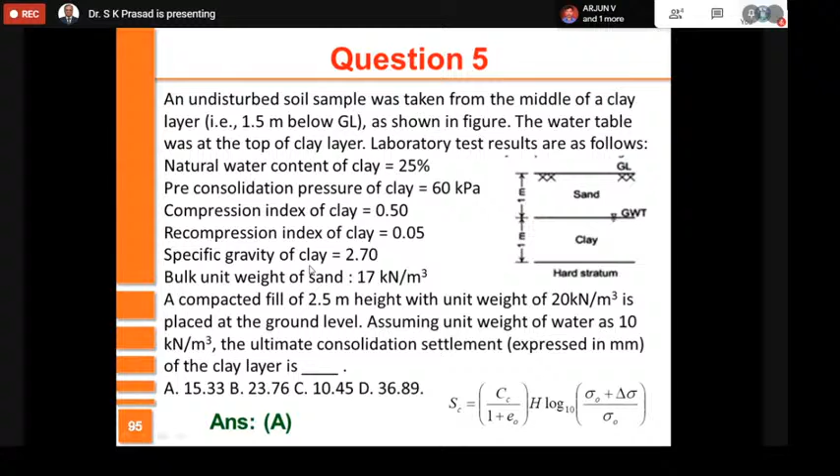Whenever the present pressure is less, it is not the virgin compression curve - you'll have to use the recompression curve, and you compute the values. I'll just go on to the next portion.

That is the secondary consolidation - so far I did not see any question on this. Secondary consolidation is also called creep consolidation. It is seen in some organic soils or very sensitive clayey soils. This happens after complete consolidation is over, that means whatever excess pore water pressure is in the soil has dissipated. Even today it's a question mark about how this happens, but definitely it is due to the redistribution of the particles.

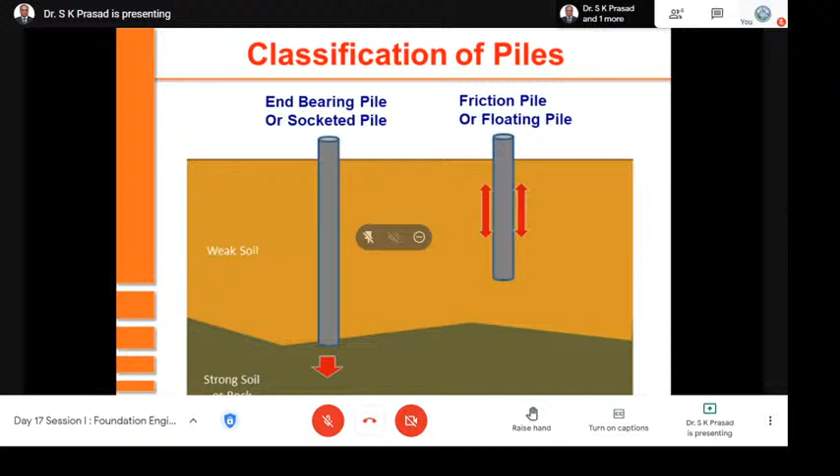So I just go back, and I'm not sure when the problem started, but anyway I was talking about pile foundation. Pile foundation is a deep foundation, one of the very important types of foundations. Given a choice, you always go for a shallow foundation, but when you don't have a choice, you need to go for a deep foundation, like pile foundation.

When do you go for pile foundation? Two important situations: first, the load from the structure is very heavy, so heavy that the soil at the surface cannot bear it. Second, the soil near the surface is extremely weak, so in that case you go deeper, you may find better soil at that depth which is firm. So you transfer all the loads from the structure through the weak soil to a stronger base.

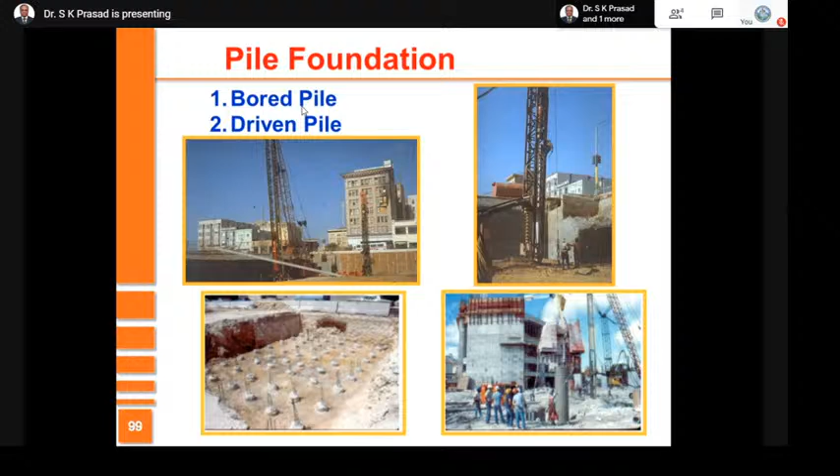There are two types of pile foundation based on construction procedure. Bored pile is one in which you make a bore hole first, put the reinforcement cage, and then put concrete. Driven pile is one in which you drive a pile exactly the same way as you drive a nail into a wall - it will have a sharp edge at the bottom for smooth penetration, and a helmet or stronger top so that when you hammer with a huge hammer, the pile head does not get damaged. You drive it till the desired length.

You can classify piles in different ways. One other classification is based on the load carrying mechanism. You call it an end bearing pile when the entire load is supported at the base, at the bottom. That can happen when the neighboring soil is weak. You also call it a socketed pile because the pile is socketed into the hard rock or hard soil.

On the other hand, a friction pile is when the resistance is offered due to skin friction between the pile and the neighboring soil. This is also called a floating pile. In this case, you assume the end bearing is negligible, very small, because the cross-sectional area is small and the bearing capacity there is also low. But these are the two extreme situations - in a normal circumstance, both exist. So you have both the frictional resistance as well as end bearing resistance. The total load P is partially carried by frictional resistance and partially at the base: P equals P1 plus P2.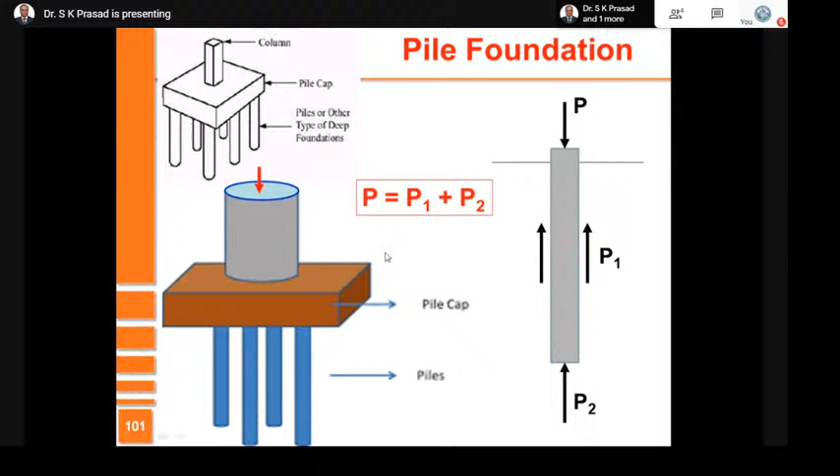And hence, I just call it point resistance at the base as P, and here it is the shaft resistance along the surface as S. So ultimate load Q is equal to QP plus QS. QS is the side friction component, QP is the...

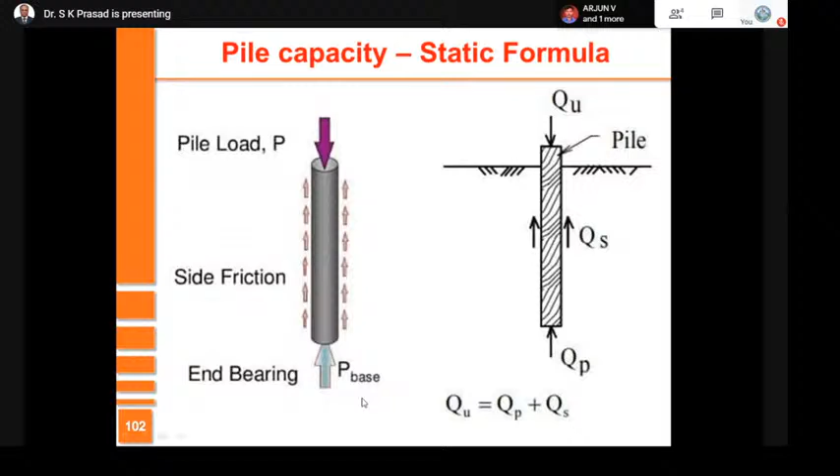Normally when you apply the load, firstly the load is carried at the base. Slowly it is transferred to the skin, surface resistance, and surface resistance slowly starts from top and then goes to the bottom. So until then, the shear here will not be mobilized. It takes some time for the disturbed soil to regain the strength. So typically, we consider the load transfer mechanism to be something like this: initially at the tip, and then the surface resistance starts from top and gradually goes towards the bottom.

So remember, pile capacity is Q ultimate equal to QP plus QS. QP happens to be the capacity at the base. QS happens to be capacity along the shaft. This is the static formula which we use for that. That's exactly what is mentioned: skin friction plus end bearing resistance.

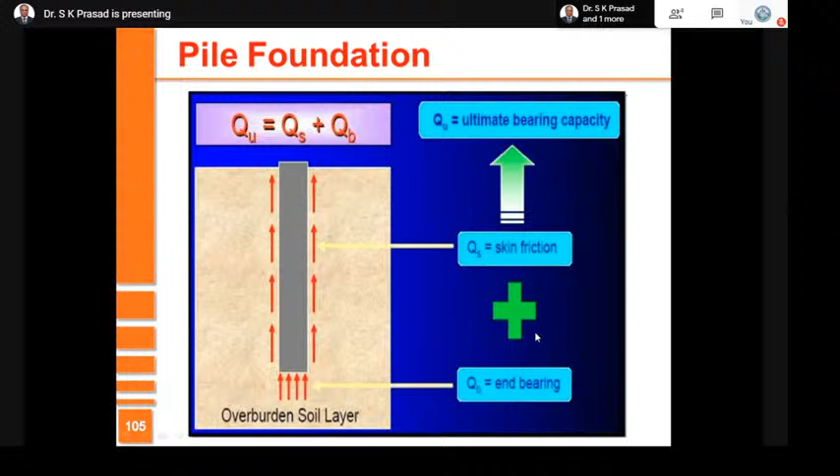And I have tried to derive here in a very simple way. The pile capacity Q is equal to QS, which is the shaft resistance, plus QP, which is the base, point resistance at the base. QS is the allowable stress, multiplied by surface area AS. On the other hand, QP is the stress or bearing capacity multiplied by AP. Q happens to be the total capacity. So QS is the maximum stress which the soil can bear, and QP is the maximum stress that the soil can bear at the base.

And in cohesive soils, QS is equal to alpha times Cu, where Cu happens to be the undrained cohesion. Alpha is called shear mobilizing factor, which is 1 or less than 1. In a very stiff soil, that value will be very low. It could be even 0.15, 0.2, 0.3 like that. In soft clay, alpha will be close to 1.

And small QP happens to be the bearing capacity. So whenever we are talking about bearing capacity, we will be interested in the first term here, that is equal to Cu into Nc. And for all practical purposes, you can take Nc value to be 9. On the other hand, in cohesion-less soils...

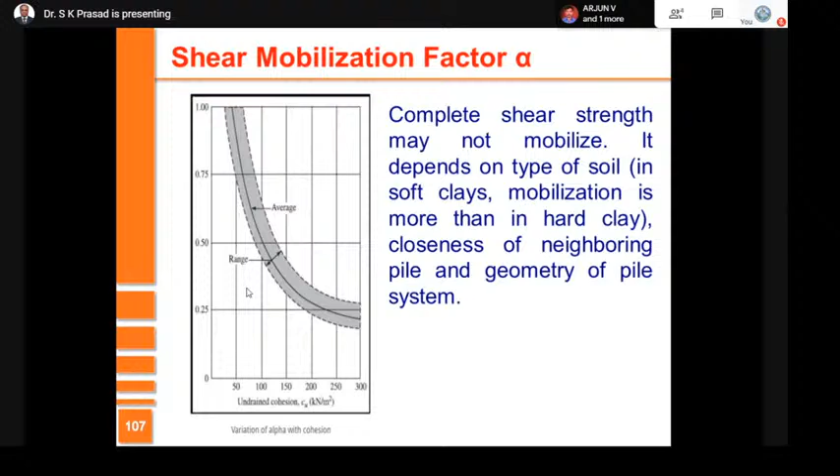You also determine the capacity of the pile based on the dynamic formula. I told you that most of the times, we have driven piles. You have bored piles also, which generally run for a smaller length, smaller depth. You have to make a borehole there, but the more popular one is the driven pile. You use mechanical hammers, so you will be able to know the resistance depending on how much effort is put for penetrating the pile. So if you can try to compare the resistance of the energy to work done, you will be in a position to approximate the pile capacity.

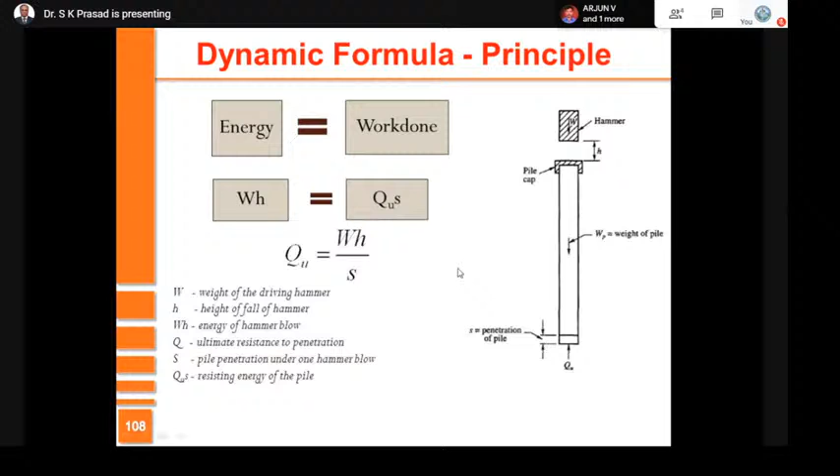So you have a few popular methods of determining the dynamic formula, the pile capacity using dynamic formula. One very popular one is called the engineering news formula, which way back in the 19th century was given by Wellington. According to this, W into H happened to be the energy input, weight of the hammer dropped from a height.

S happens to be the amount of penetration you see in the last number of blows. You take the average value. C happens to be some constant.

Allowable Q will be equal to the ultimate Q divided by factor of safety. Because of lots of uncertainties involved, you choose a very high factor of safety of 6 to find out the capacity. In Indian standard codes, Hiley's formula is used accordingly. This formula is more involved. It takes into account the efficiency of the hammer, efficiency of the blow, the effect of the soil, effect of the helmet, effect of the pile and so on. Therefore, it is more involved, and you can find out the pile capacity from Hiley's formula.

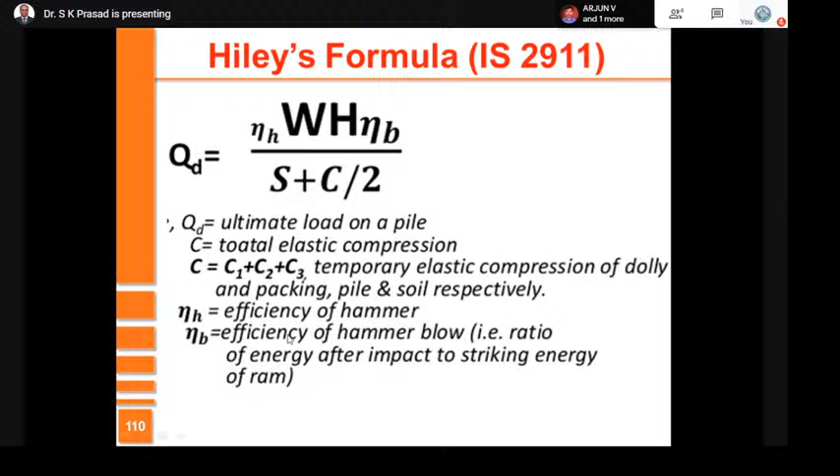There are a number of comments on dynamic formula, but the biggest advantage is that you use the formula to determine capacity. In driven piles, you are anyway going to drive the pile, so while driving the pile, you try to find out how much resistance was offered, and accordingly you determine this.

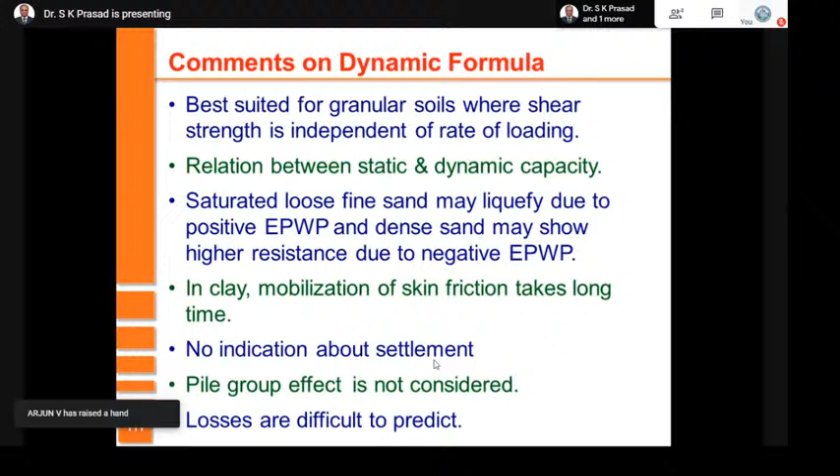Piles are never put singly. Piles are always in a group, and whenever you take piles in a group, you will have to consider the efficiency, because when piles are in a group, the total capacity is not equal to individual capacity multiplied by number of piles. It is much less than that, especially for floating piles, especially piles wherein the frictional component is taken. It's important for us to determine the group efficiency, which is less than 100%.

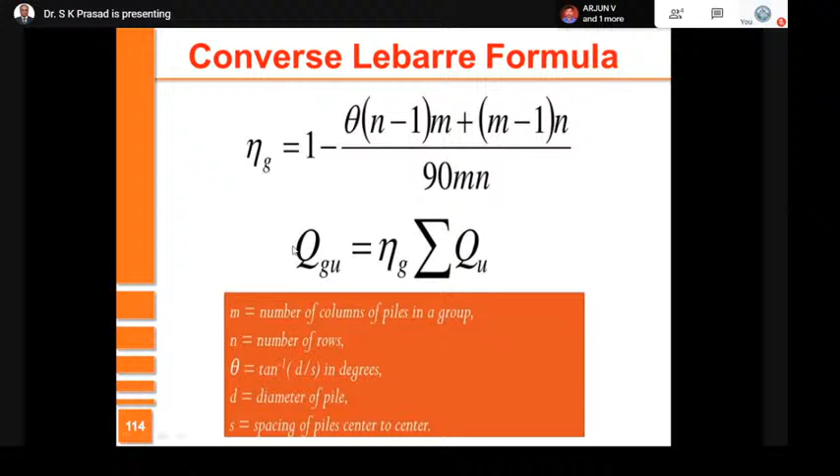Piles are generally put in different arrangements like this, and you have formulae to determine the efficiency. I always like Feld's rule, according to which 1/16 of the efficiency is lost due to the neighboring pile.

You also need to consider negative skin friction, which can happen in filled up soil, organic soil, when the groundwater table recedes continuously, when the soil is highly compressible, and when you have heavy surcharge. Negative skin friction is very dangerous, and load carrying capacity reduces because of that.

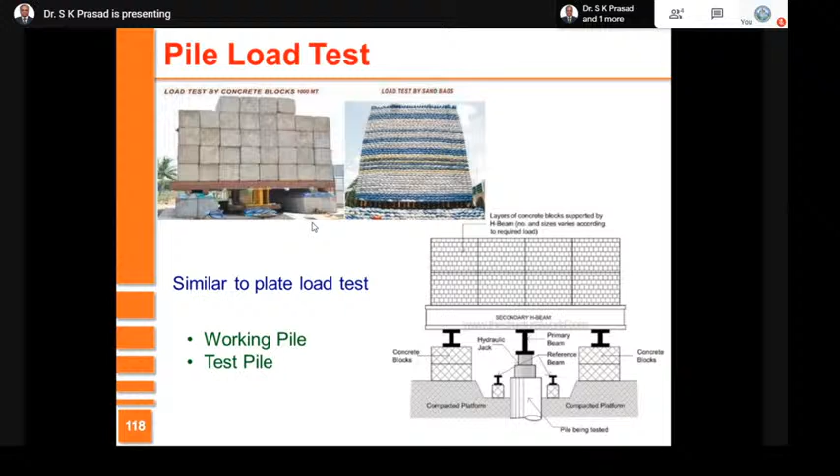Pile load test is very similar to plate load test, and you try to determine how much is the capacity of the pile. It is done either on the working pile, which will be used later on as a pile foundation, or on a test pile. Pile load test can be conducted both by gravity loading as well as reaction loading, and a load settlement curve is plotted.

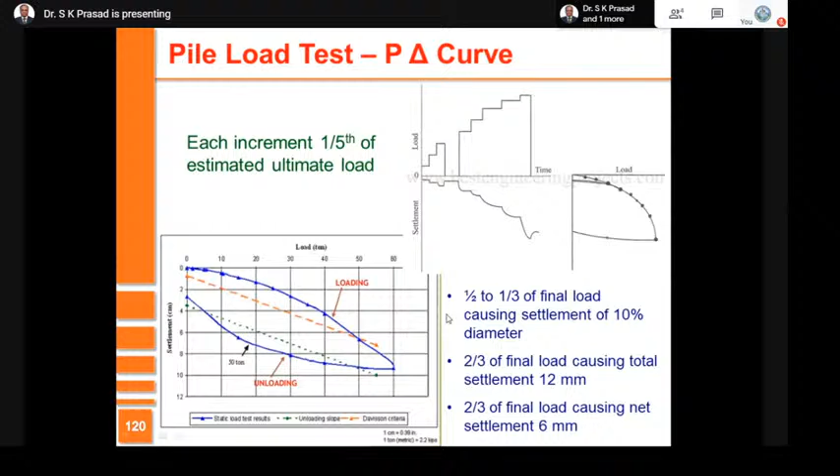I'm going to stop here because it is time now. I would have really enjoyed solving a few problems here, but anyway, I only want to mention that this is a vast and very important subject.

Lot of questions do come from foundations, especially shallow foundations. Also, there are questions which I have seen on settlements. So keeping that in mind, I want you people to prepare well, and this lecture will definitely be useful for you to understand the concept and solve as many problems as possible.

I have tried to solve here, or I have actually considered several problems and solved them. Please keep that in mind.